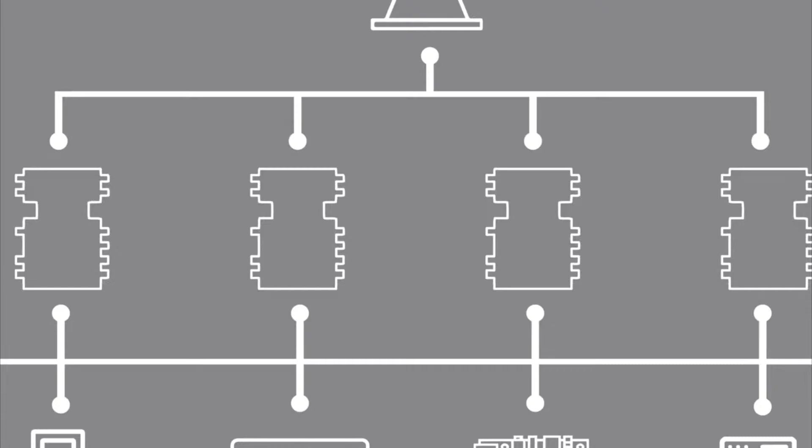Universal Automation allows us to use software and hardware in a whole new way to create portable applications and innovative architectures. For the first time, IT and OT engineers can easily work together, combining real-time with right-time to create cost-effective and innovative ways to address complex use cases, like predictive maintenance, production optimization, and virtual commissioning.

But how does Universal Automation really impact you? Vendors can use the Universal Automation reference implementation to bring IEC 61499 offers to market fast. That means new software revenues, new business models, and new customers.

Universal Automation frees industrial enterprises to integrate best-of-breed components and proven in-use software. You can realize step-change advancements in efficiency, flexibility, and modularity with agile operational models. It's time for us to release the full potential of the fourth industrial revolution.

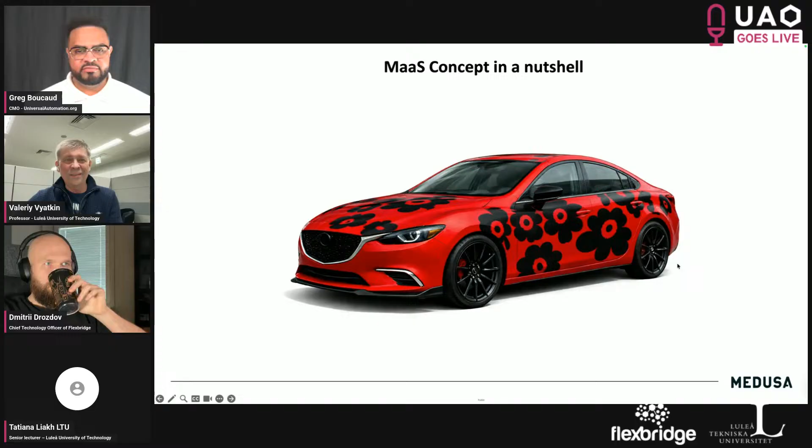I want you to imagine a scenario that is easy to digest of manufacturing as a service. Suppose that you want to order a car that would have some kind of customized painting, like the one on the screen with Marimekko flowers on the car paint. And you go to some web platform where you present your dream.

And this Medusa platform, that is a target of the Medusa project, will be trying to fulfill your dream by contacting the available manufacturers who advertise such services. And it could go deep enough into the internal data of these manufacturers to understand to what extent they are capable of fulfilling this task, how precise they can make the paint on your car, and how available they are, when and at what cost they will be able to deliver the result.

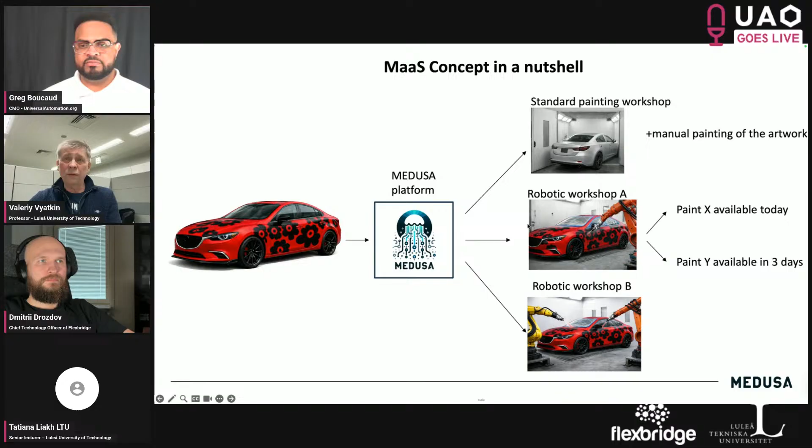And all these offers from the manufacturers will be passed to the platform for matchmaking and for deciding which one will be winning and granting the order from the customer. And doing that may require quite a deep plunge into the automation system of each manufacturing site, understanding what are the skills and what are the capabilities and abilities of each of these manufacturing sites.

So if we look into the industrial automation side of Medusa, which is not the whole project, of course, the project is much bigger and is covering everything in this big picture, but the automation side of Medusa, we can see the following workflow. The automation developer would need to implement possible requirements that are coming from the customer's customized product implementation. So all these requirements may include original design documents, capabilities of equipment, wiring diagrams, description of the product, etc.

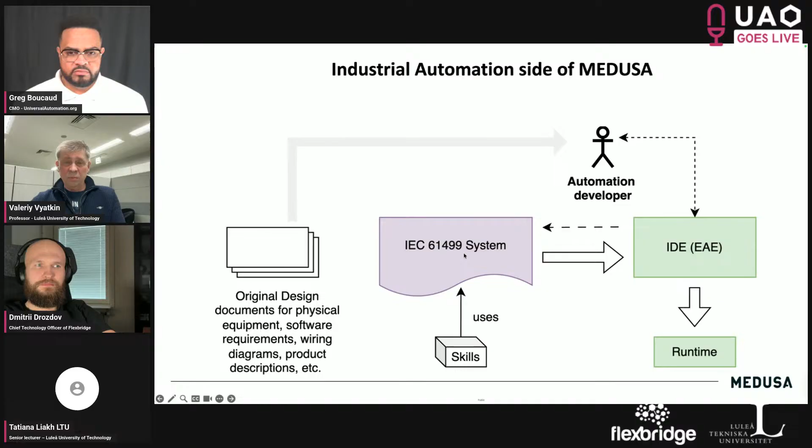So all this information will be digested by the automation developer, and using software tools such as an integrated development environment, it will be translated into executable code using IEC 61499 language or architecture, in which the idea will be implemented. Then using the tool, it will be materialized into executable code, downloaded into runtime. And in Medusa, we agreed that we will use a specific design pattern for development of modular and flexible automation systems that is based on the concept of skills.

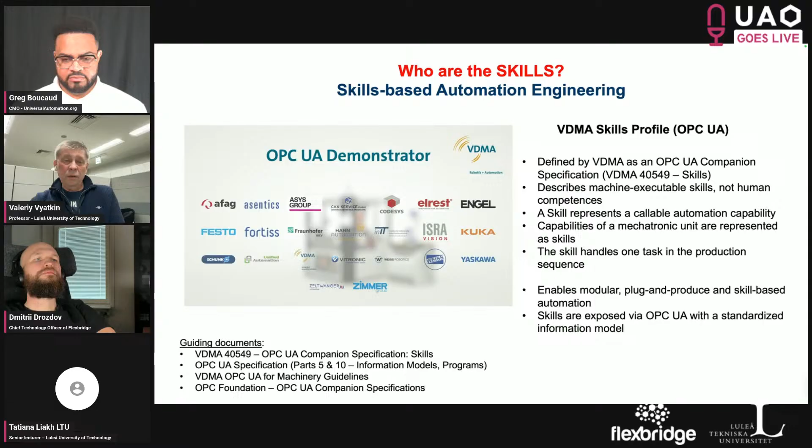So what are the skills? I just want to quickly remind you that skills is not our invention. We refer to documents created by such respected organizations as VDMA and OPC UA, who have created this concept and even implemented it using an OPC UA demonstrator, as you can see in this video in the slide. That was used as a kind of concept proof for the skills idea.

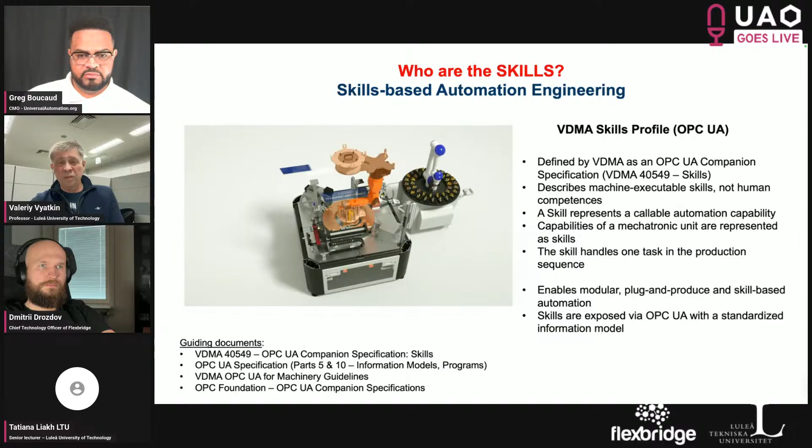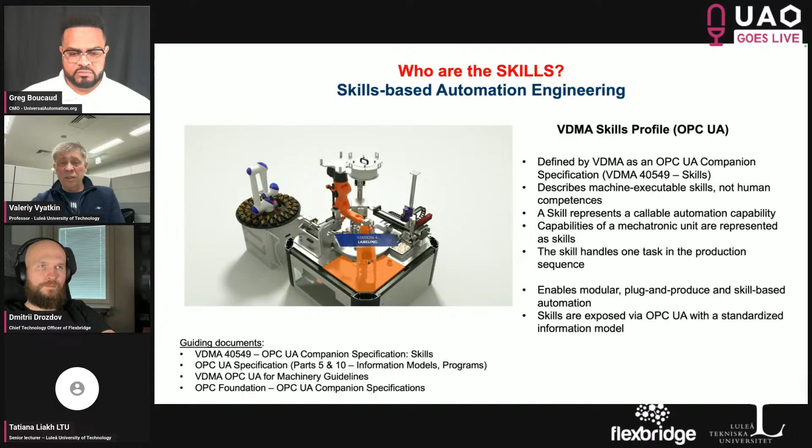So this assembly machine, where more than 30 different vendors combined their force to demonstrate that skills as an architecture could help achieve interoperability between different vendors. So design of an automation system from independent modules coming from different vendors, and then exchanging messages that are high-level commands, which are the skills. So these basically are high-level commands which allow one part of the machine to call an operation in another part of the machine in a very easy way.

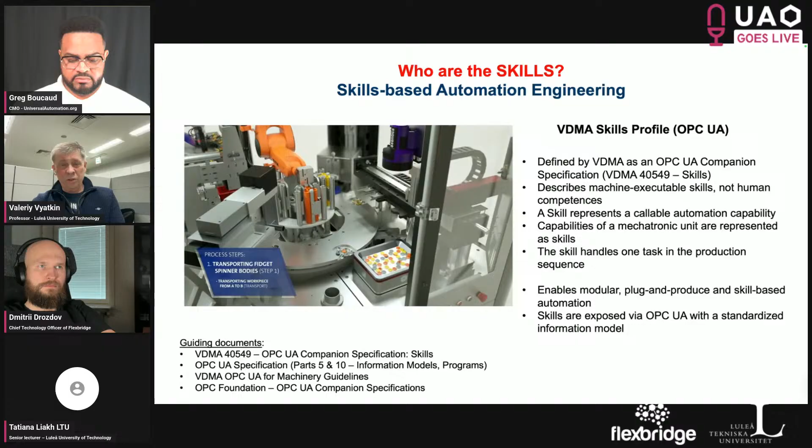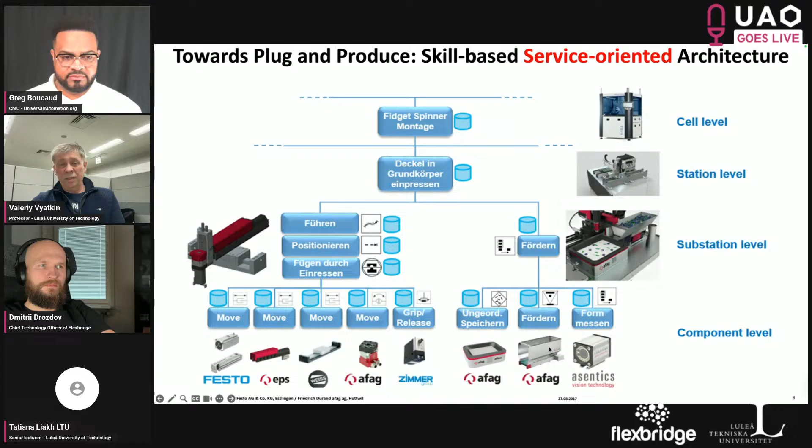So for this particular machine, you can see an illustration of how the whole process was decomposed and organized on the skills of the entire cell level, then of subcomponents, then of smaller components, and so on and so forth, down to the operations of such basic components as pneumatic cylinders and motors and other basic mechatronic devices that build this system. So skills is quite an established concept in automation.

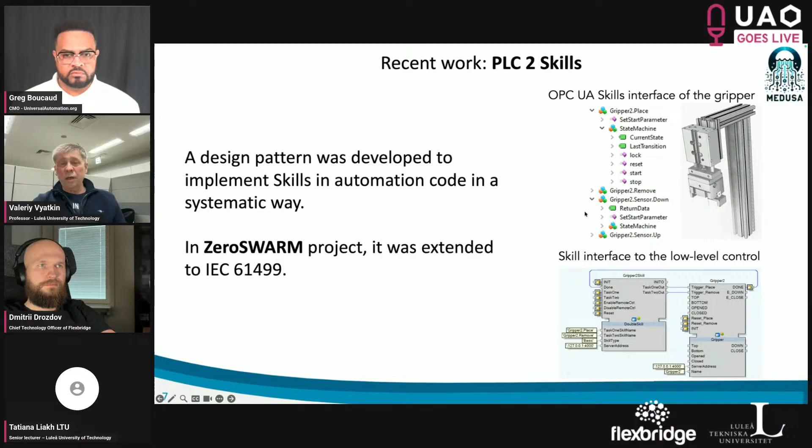It's supported by standards, and in a recent European project, ZeroSWARM, it was linked also with IEC 61499, where we demonstrated how the concept of skills has multiple sides. So these basic operations can be invoked through OPC UA, but they can be also implemented as function blocks of IEC 61499 and invoked by just emitting events to the function blocks. So they have this kind of duality, and simultaneously can be reached through different communication means.

And if we look into the internal organization of a skill in IEC 61499, it can be represented as a composite block or CAT in EcoStruxure Automation Expert, where it has a well-defined internal structure. And one core part of that skill is the so-called skill basic function block, which has an external interface. So the third way the user can communicate with the skills is through an HMI panel, through some kind of faceplate where the user can just press buttons.

And also it has a standard state machine that defines the operation of any skill. So any skill doing any type of operation follows this state machine on the top level, which is a very good way to document and explain to the user how every skill operates. But there is also specific control logic of the skill that is defined again as a state machine and implemented as another logic function block that is a part of this composite skill function block.

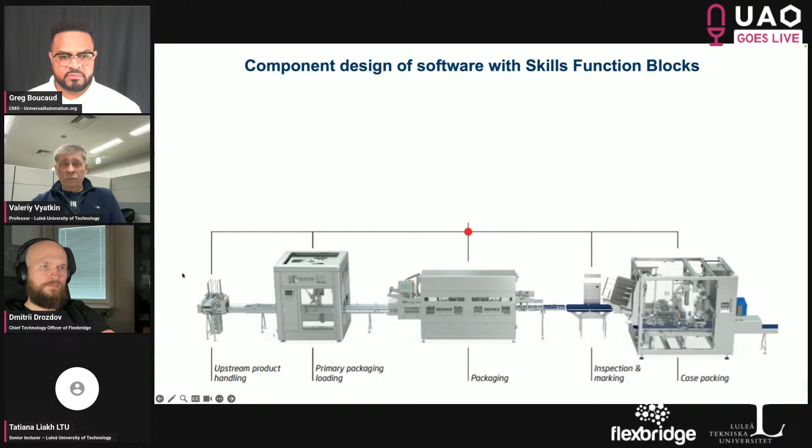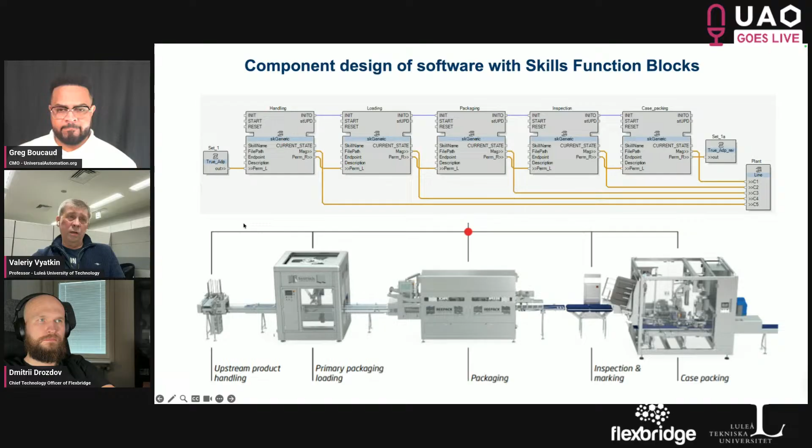So when we design automation of modular systems, such as this packaging line of our project partner Repack, what we ideally want to do is fetch skills from the library of skills, one top-level skill per module, and organize our software in a way that is very similar to the mechatronic organization of our production line. So that is the dream of the automation engineer, right? Just fetch, connect, plug and play.

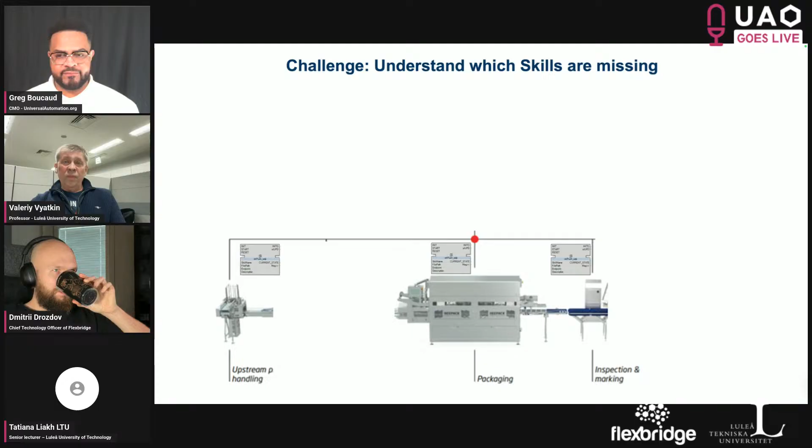But in the context of our Medusa project, when we have different production lines advertising their services for fulfilling a particular request from the Medusa platform, we may encounter the case when a certain production line only partially fulfills the requirements. And the Medusa platform needs to understand to what extent this production line fits the requirements, identify gaps, what is missing, and try to suggest what can be added to this production line in order to make production of a certain product possible.

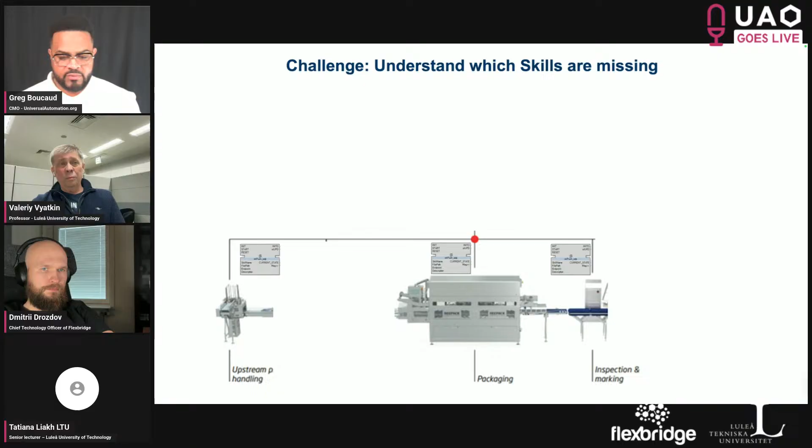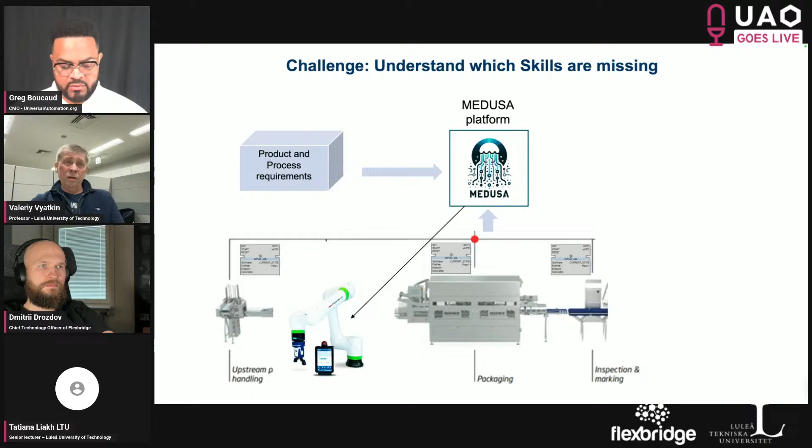So the Medusa platform would first interrogate, even online, connect to the production line, understand its internal organization, understand its software skills, and then make suggestions. Having received product and process requirements from the customer, it may suggest that certain mechatronic units need to be added to this production line and certain software skills need to be developed and added to make the whole production line capable of fulfilling the overall task of the customer.

And this is where we are. And this is the problem we are trying to solve: how to automate this process, how to make it zero effort for the developer using artificial intelligence.

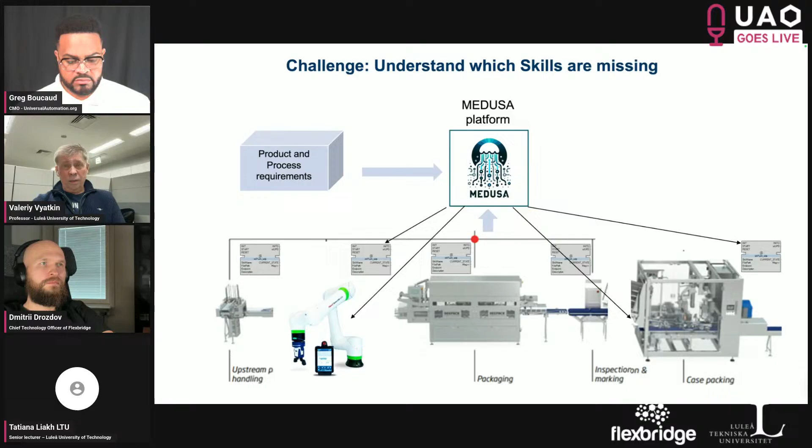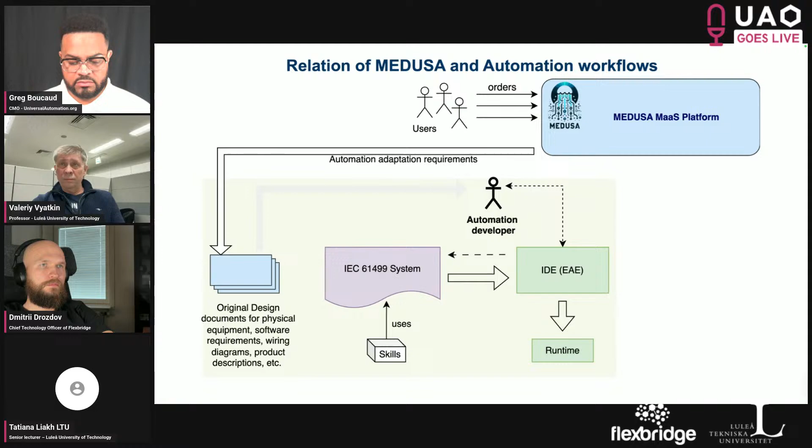So the workflow we are working on in the Medusa project is as follows. The Medusa MaaS platform receives orders from the customer, and here we have the fbAssistant tool that will be helping the automation developer to create the software artifacts, having received the requirements, original design documents, and product descriptions. Instead of the automation developer manually developing software, it will automatically generate the needed software and let the automation developer understand what is suggested and refine it in order to make it fully correct and running.

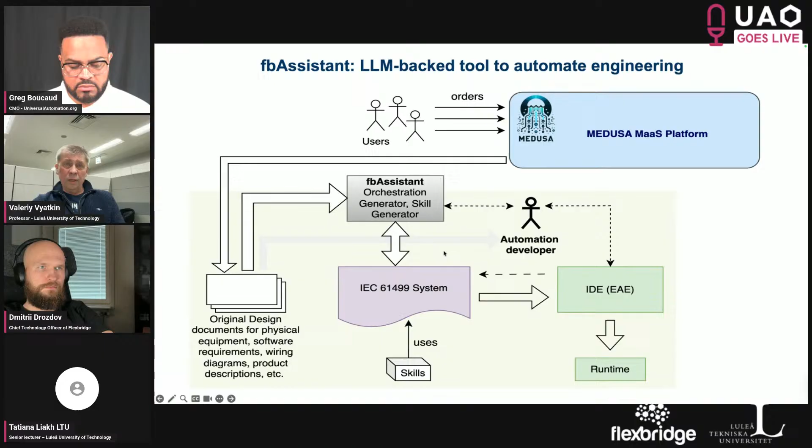In the previous sessions of LinkedIn Live, we already presented the basic idea of a Function Block Assistant tool that runs in parallel with IDEs for IEC 61499, such as EcoStruxure Automation Expert of Schneider Electric, or with any other IDE. Receiving natural language requirements, it generates equivalent state machines which implement these requirements. Then it can generate function blocks of IEC 61499 and put them in the repository, where they can immediately be picked up from EcoStruxure Automation Expert, for example, and executed, compiled, and deployed to PLCs.

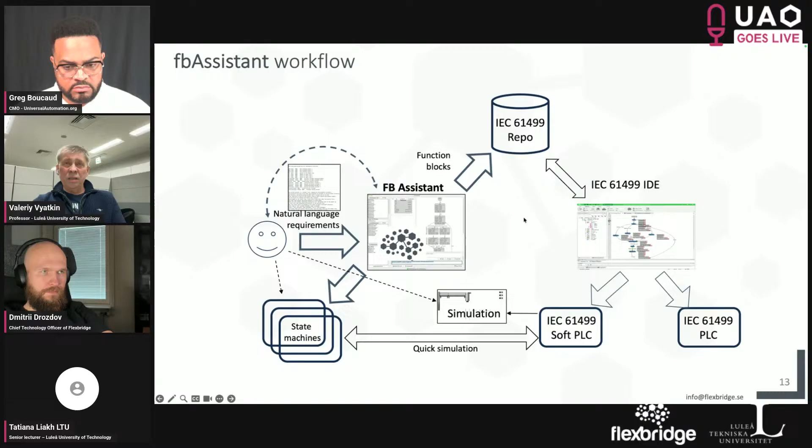Also, Function Block Assistant has a service feature of directly simulating state machines against simulation models that are deployed and run from EcoStruxure Automation Expert. So this is just a reminder, if you missed the previous sessions, of the basics of the Function Block Assistant tool.

Also within this Medusa project, we are exploring the potential of ontological knowledge representation that helps us to have a unified representation model of different types of knowledge: the knowledge that describes production lines, knowledge that describes the product, and the knowledge that describes our automation software. These are quite different artifacts, and it's quite hard to describe them with the same means. That's why we are using these ontological representations, using semantic web technologies, where all of this can be represented within the same knowledge framework.

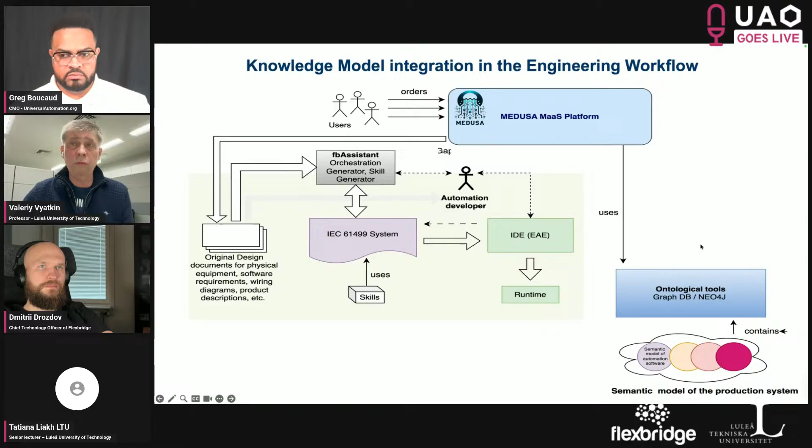So let me illustrate what I mean using a smaller example of a mechatronic system that we will use as a running case in the demonstration today. This is a combination of two small machines from Festo Didactic. One is a magazine for storing work pieces, and the other is a pick-and-place manipulator that takes a work piece from this magazine device and places it on the other side to continue processing in other machines.

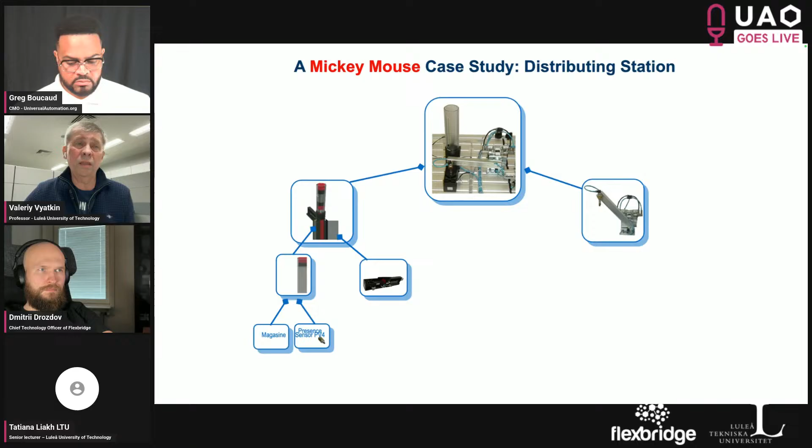If you look deeper into this machine, it's composed of two mechatronic components, and each of the mechatronic components again is composed of several elements, such as the magazine and the pusher. The magazine itself has a tube with work pieces and a sensor, and the other components also have a complicated internal organization, including sensors, a suction unit here, and so on.

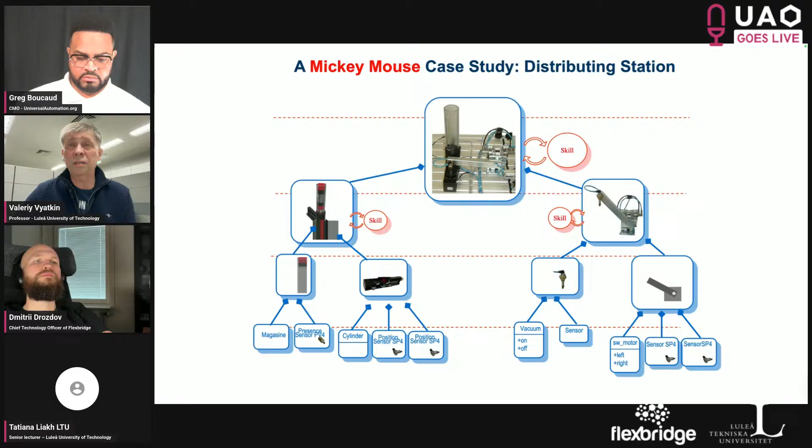So when we apply the skills concept, of course, on the top level there should be a skill describing the operation of the entire system. But each mechatronic component will come with its own skills, which need to be combined and orchestrated into the skill of the entire system, and that applies downwards to all the levels of the hierarchy.

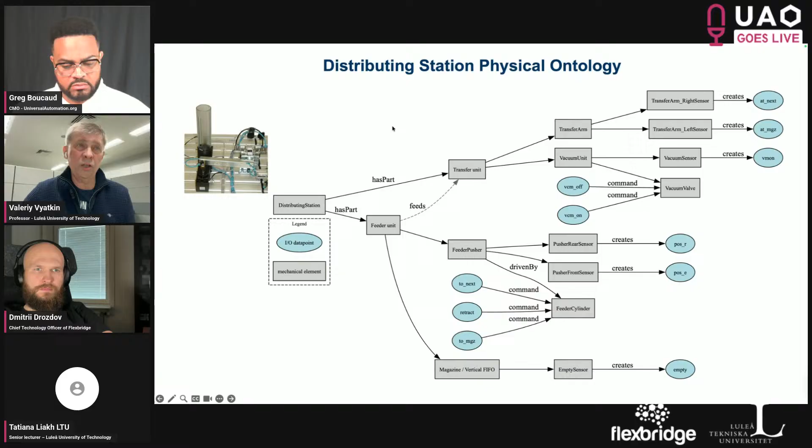So this graphical way has also an equivalent textual way of presenting this knowledge using web ontology language. But for simplicity, we will use just graphical in this presentation so that it's more understandable what we mean by ontology. The same applies to description of production process. We can also represent it graphically using the same web ontology language or knowledge graph, and we can apply the same idea to

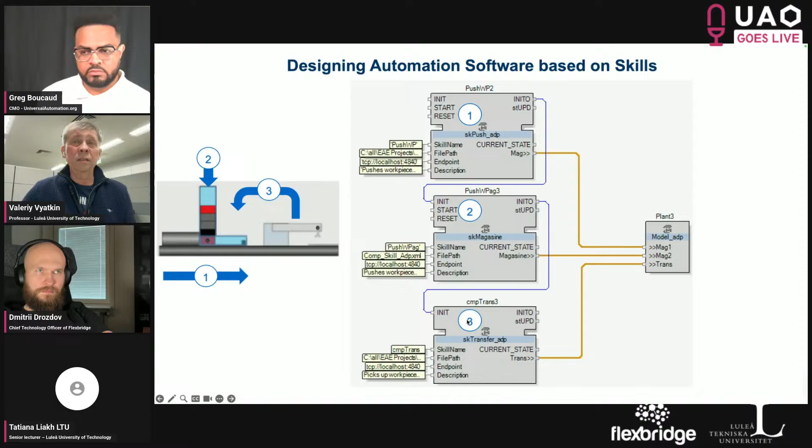describing our software. So if we imagine that for this mechatronic system, we would need three software skills, three software components to operate it. One for pushing workpiece forward, another for filling and replenishing the magazine with more workpieces, and the third for pick and place operations. So we would have 3 skills, 3 software components.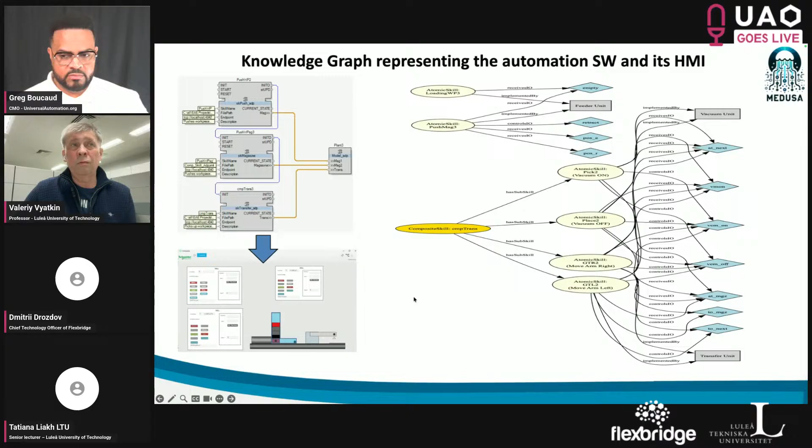So this semantic graph represents the overall software structure of this system. Now we can combine all of these together because they use the same ontology, web ontology language, and we can start reasoning on top of it to understand whether the combination of software capabilities and mechanical capabilities and maybe electric capabilities is good enough to manufacture the product described in the same language.

And we can use for that the reasoning methods, which are supported by tools for ontology, but also we can use the power of LLMs, which can be fed with all these inputs and which can try to guess what is missing here or whether this is sufficient for manufacturing.

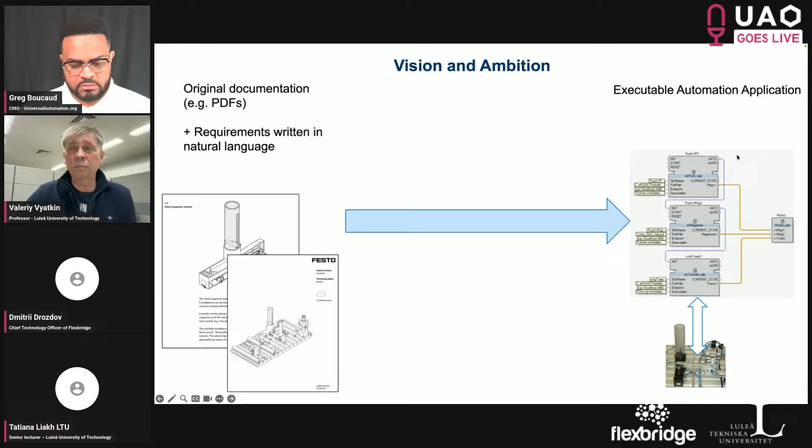Okay, so what is basically our vision and ambition? We want to drastically simplify the path from all these requirements written in natural language and other requirements describing the product and describing the process, like original drawings, maybe technical drawings, PDF files. So take all these inputs and with a sort of one button click, convert it into fully executable IEC 61499 software that can be deployed and control real automation systems.

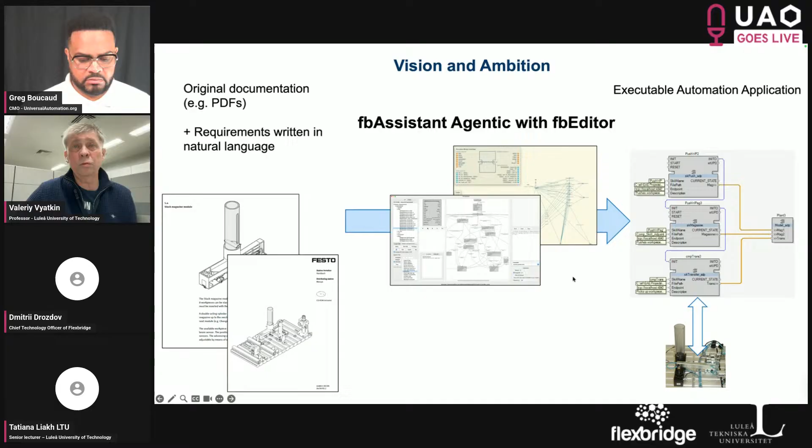So for that, Flexbridge is developing an agentic version of fbAssistant with an editor. And this tool will take these inputs, will generate the software artifacts, and will let the user make some quick corrections of these software artifacts before they are deployed and executed in physical machines.

So currently, fbEditor, that is a foundational platform for integrating all functionality of fbAssistant, is implemented as a plugin to Microsoft VS Code, and it is capable of working simultaneously on the same code repository as EcoStruxure Automation Expert. It can be executed in a web browser, or it can be executed in a standalone version as a plugin to VS Code in the desktop version of VS Code.

So it's work in progress. It's already quite functional and supports most of IEC 61499 artifacts. And we are working on extending its functionality so that you can see inside this tool exactly the same project as it is opened in the EcoStruxure tool.

Okay, and now I want to go to a kind of live demo and ask our Universal Automation support to run the video. This video will present the tool in action, and I will try to narrate how we envisage using this tool chain. So the first step is you just create an empty project in EcoStruxure Automation Expert, and you import a Flexbridge skills library that is needed to help fbAssistant create software artifacts, so it includes certain templates.

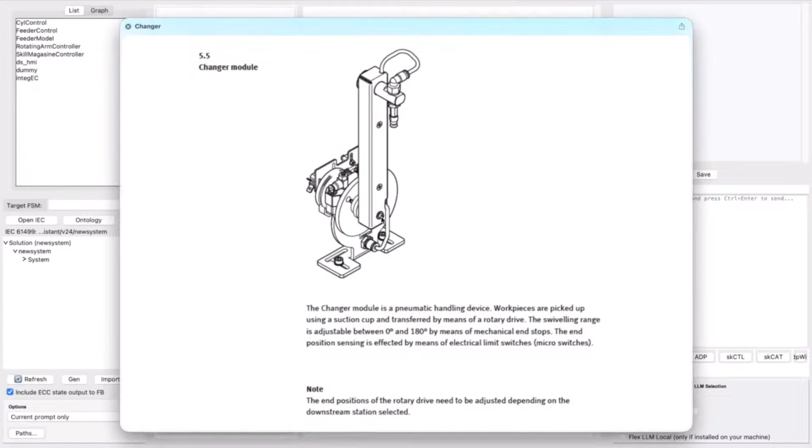We can see it here, and then we start the process with importing original design documents, such as, for example, this original documentation from Festo that describes desired behavior of this station, and maybe its mechatronic organization. So these are PDF files that are coming from a vendor of equipment, and this includes ideas of the vendor about the functionality of this equipment.

So we just take all these bunch of original documents and import to our tool with intention to extract the knowledge from these documents. So we uploaded 5 PDF documents from original Festo documentation, as you can see. And the first step for what we want to extract is IO list of signals which this entire distributing station would have. And this feature is implemented using backend LLM.

And here is a result. So from the documents, fbAssistant has created a list of inputs and output signals and the types and verbal description of each signal. What is it? What is the semantics of this signal? So now we ask it to divide it into separate lists for 2 mechatronic objects. We have the magazine and the changer, we call it, this pick and place device. And now we create separate lists.

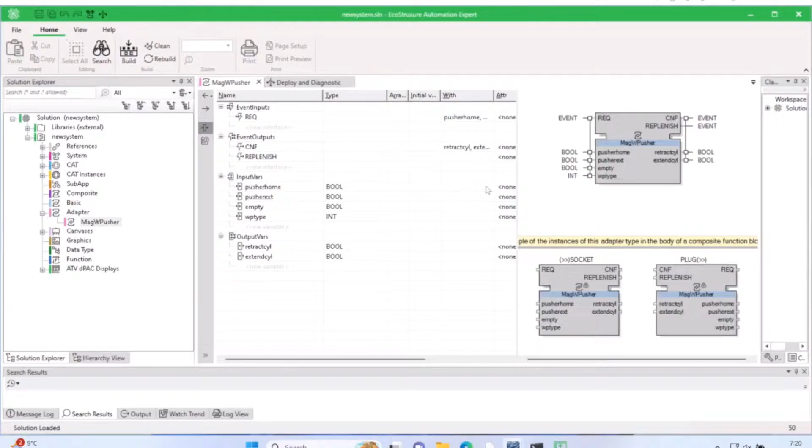And from these, we start creating IEC 61499 artifacts. If you know IEC 61499, it has this foundational artifact called adapter interface. So we read the IO lists, and for each of these mechatronic objects, we create adapter interfaces, which are immediately visible in EcoStruxure Automation Expert. And you can see that now we have one adapter interface for the magazine mechatronic component, and then we will create another one for the changer mechatronic component that is a pick and place manipulator. So this is a starting point of the development.

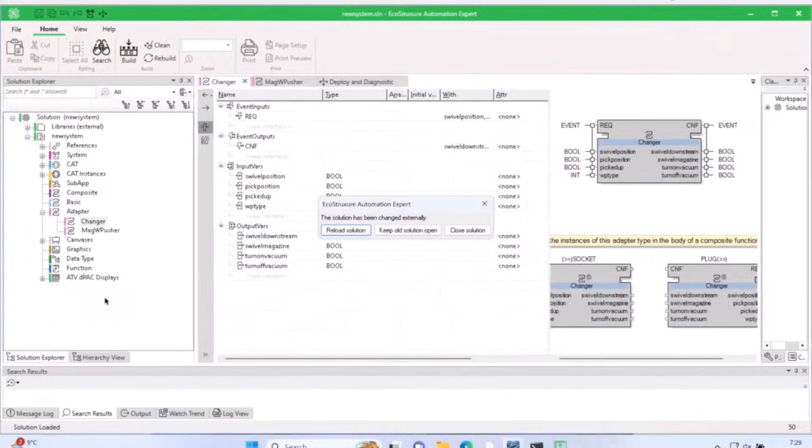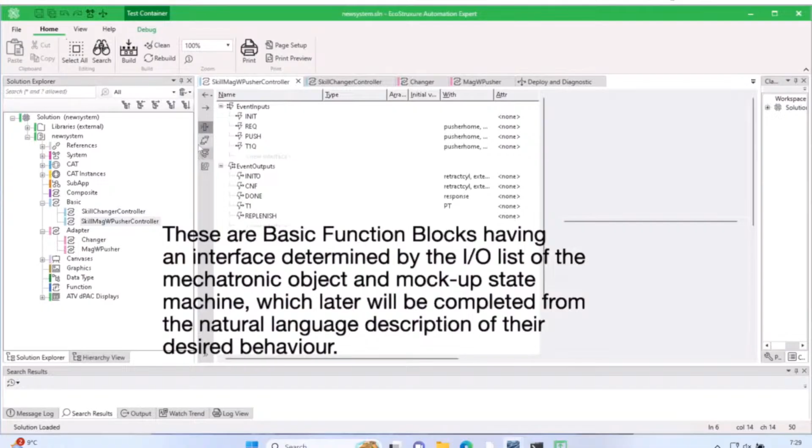We have adapter interfaces, which later will be used by more complex function blocks and will be used as a basis of connection between function blocks, between the skills in our application. Now we can create mock-up function blocks which will hold the logic of the autonomous behavior of each skill, this custom operational logic. And this step is based already on knowing the adapters. And now these blocks are generated. These are basic function blocks. And they have almost empty state machines. So these are just dummy state machines, which later will be refined into fully functional state machines.

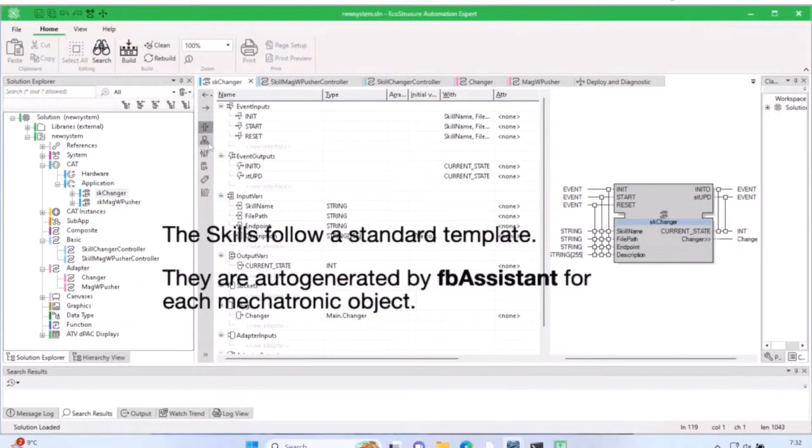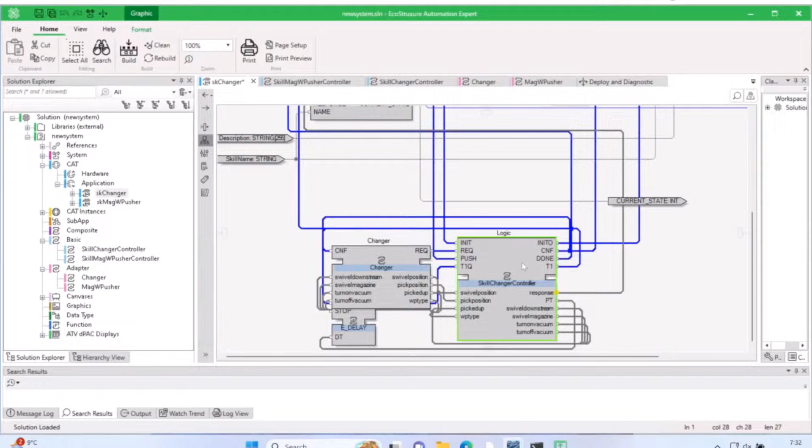And then on top of this logic, we create the wrappers, the function blocks representing entire skills infrastructure. That includes the standard state machine of the skill that is defined in the skills OPC-UA standard, and also includes other servicing functions, including HMI, so that the skill can be accessed through the faceplate. So then, yes, here you see we, in one click, auto-generated the skills function blocks, in which inside we have the logic we just created in a step before with an empty state machine.

And now we need to automatically compose the skills together into the complete application. So we prefer first going this way, and then later we will be refining the operational logic of each skill. So we add the configuration information, and as a result, we create the application. And this application will be then passed to EcoStruxure Automation Expert.

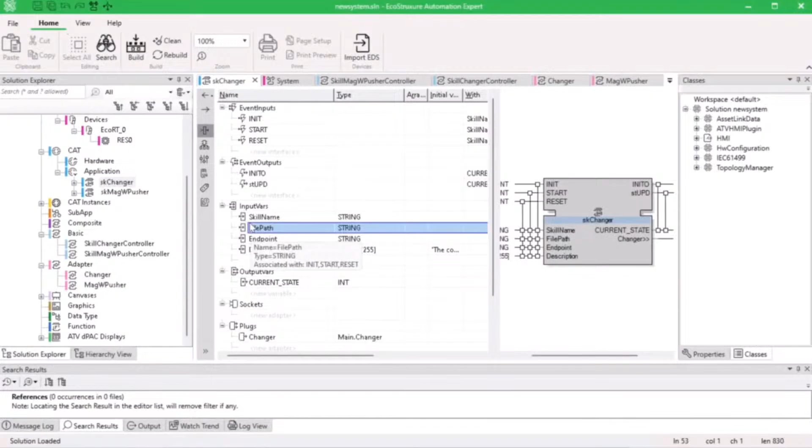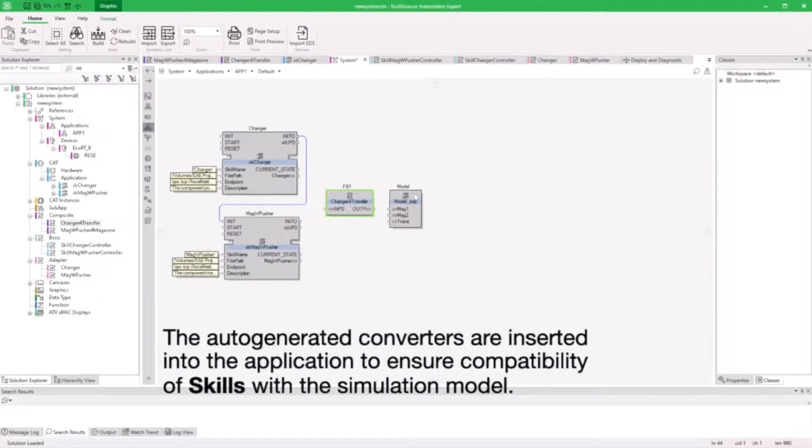But then we discovered one interesting effect, that once we want to integrate the application, for example, with a simulation model that was pre-furnished before our development, they may refer to different names of data. So we need to do matchmaking between the data. And for that, we also use the power of LLM, using which we can create a converter between naming of signals that we use in fbAssistant and naming of signals that were used by the developer of the simulation model of this object. So we auto-generated function blocks which convert adapters developed on the side of fbAssistant with adapters used by the developer of a simulation model.

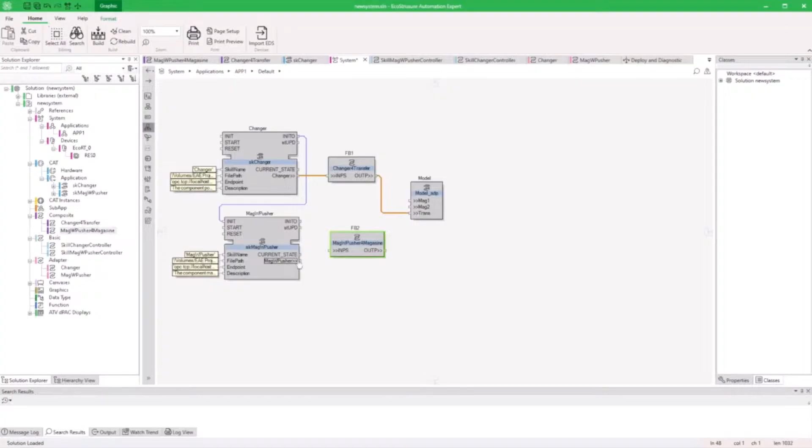You see, we insert them in between so that the data can flow freely, despite the different naming conventions used by different developers. And then we just insert another such converter, and technically after that, our application is ready. It's fully automatically generated, but then we need to go and implement the core logic inside each skill function block.

And again, we first ask LLM to provide a kind of brief description of the desired behavior extracted from original design documents. And we give the user a chance to check and correct these texts before they will be passed to fbAssistant and will be used to generate a state machine of each mechatronic component behavior. Now we pass it and we ask to generate the skill function finite state machine.

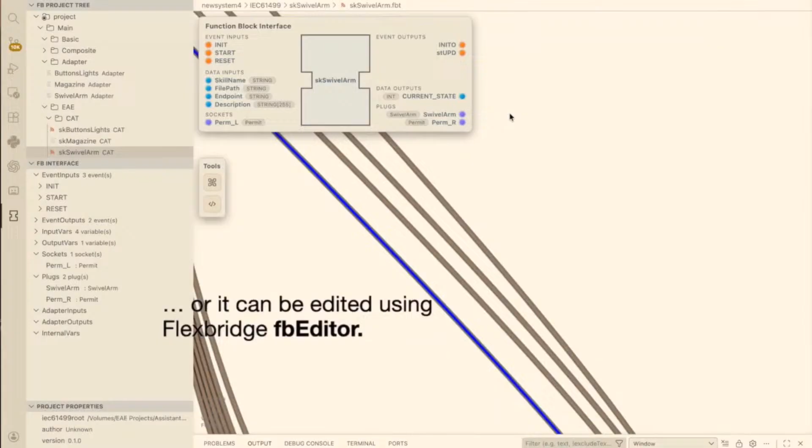Just in fbAssistant, the states are expanded, and you can see what is inside of the actions and algorithms in each state. So this editing can be done here. But we can also do editing in the FB editor that is a part of fbAssistant. You see that the Flexbridge fbEditor can represent all artifacts, like composite function blocks, for example.

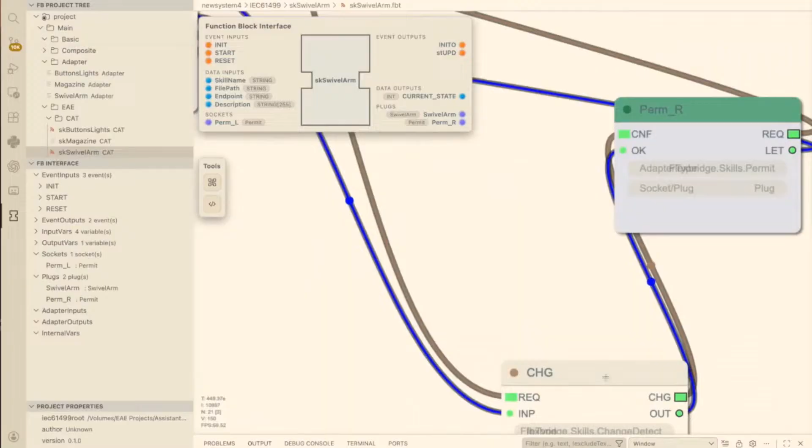And we can also go to the state machine, and we can edit it. We can make quick corrections after visually examining the state machine. We can change the events to be emitted in each state, or change the actions, change algorithms, and so on and so forth.

Besides, on the IEC 61499 side we can also use AI services. We can use an LLM for analyzing, for example, our ECC in the basic function block by asking questions in natural language, like this one, trying to understand if outgoing transitions are complete, in the sense that they cover all possible combinations of logic values. And the LLM makes an analysis and gives us a report on that.

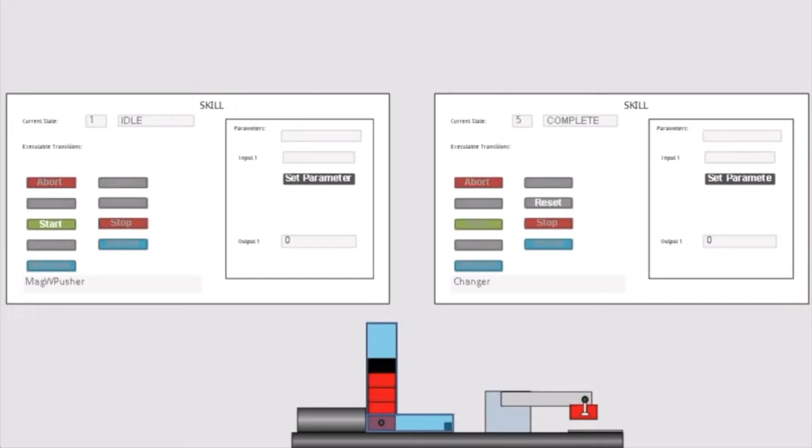And finally, using EcoStruxure Automation Expert, we can just deploy this auto-generated application to make sure it is running properly and the auto-generated state machine logic works. So it is connected with a simulation model that is also implemented within function blocks. And the skills are represented through the faceplates. So by invoking skills of each mechatronic component, we can see that it's working as expected and moving workpieces from one mechatronic device to another and further down to subsequent machines if there were such machines.

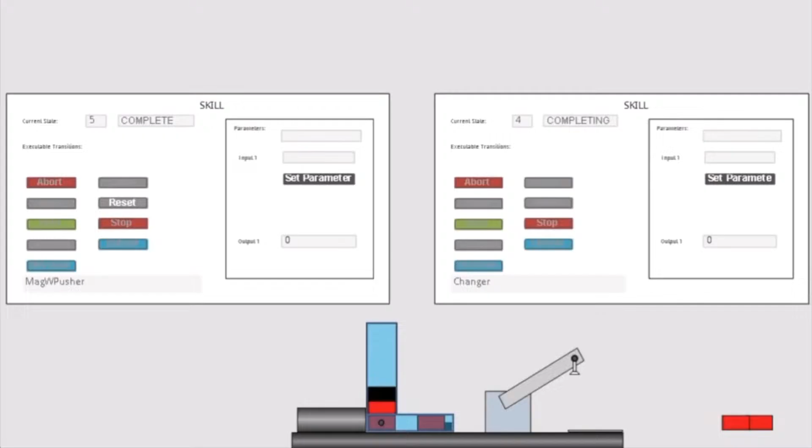Okay, so that was a live demo of the current state of our development, and we keep working on optimizing this agentic flow. Maybe Beata, you can stop the video and let me just show the next slide, the last slide. Thank you.

So as you can see here in the left corner of the fbAssistant tool, we have an agentic flow that starts with creation of the IO list and ends with mapping the application to resources. So basically with one button press, we can invoke the entire agentic flow and sit and wait until the tool results in a fully auto-generated 61499 project that can be tested or edited using the FB editor and EcoStruxure, and then executed and commissioned.

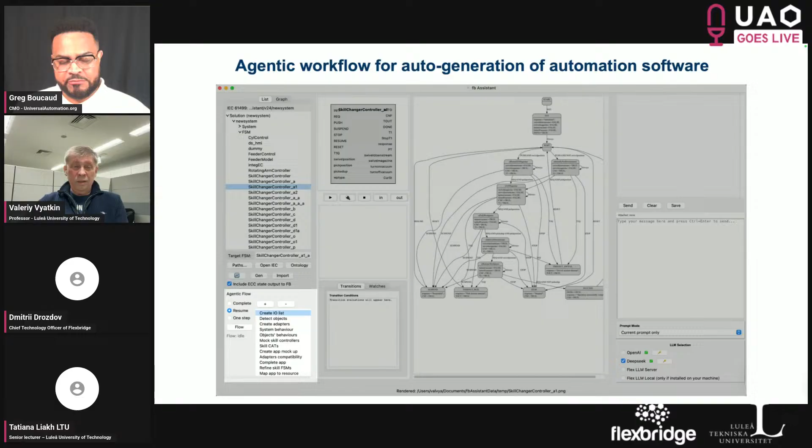So that's our current state of development and our intention is to achieve this for more and more realistic and large automation systems. Thank you very much for your very kind attention, and our team will be happy to answer your questions, if any.

Thank you, Valeriy. Thank you for this great introduction about all the tools that you have done, and you have all done a great job. Yes, that was the third part, where we were introducing AI into IEC 61499.

Currently, we use an LLM from OpenAI. So that's based on ChatGPT, but we've also been experimenting with DeepSeek, as you can see in our fbAssistant tool. We have a switch between different models, and the same applies to the FB Editor. Yes, obviously, it may require an additional subscription, but we also experiment with our own LLM running on our server that is based on the OpenAI 120B model. I think for most of the tasks it's quite capable, and that could be provided without subscription, I guess, or with minor subscription costs.